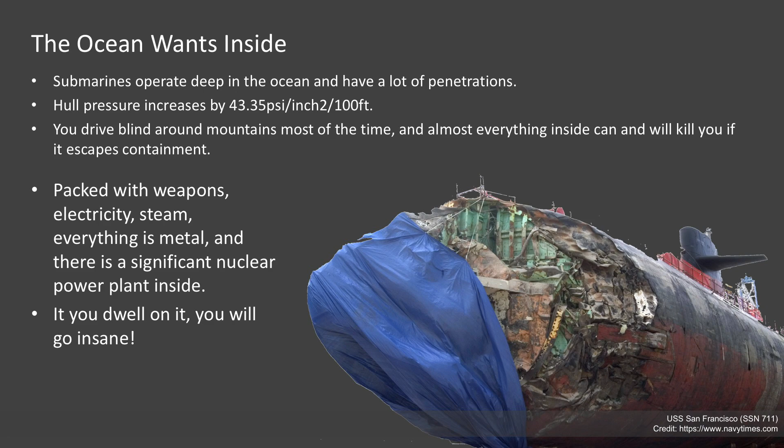It's packed with equipment that, quite frankly, virtually everything that's in containment inside of the submarine wants to kill you, including a rather substantial nuclear power plant that I ran. And so it's an interesting place to work, and if you dwell on it, it will absolutely drive you insane, and I've seen people actually lose their mind.

As if that's not bad enough, the guy who's been on the boat the longest has been there for 3 years. Think about that. So when people talk about training, I'm always kind of surprised at the inability to face the fact that we need to train. And the military probably does it better than anybody on the planet because they turn over crews, especially in the Navy, on a regular basis. And obviously, if you get shot in combat, somebody's got to step into your shoes immediately. So training is a constant.

There's a real good chance the guy sitting in the controls like you see right there, and you can see that's a pretty sophisticated video game he's got, with all the knobs and indicators. I never was on that boat. I tried to get on that boat. I really liked that boat. That was a USS Seawolf class. They didn't build a lot of them, but it was a state-of-the-art attack submarine, extremely stealthy, had some really cool technology.

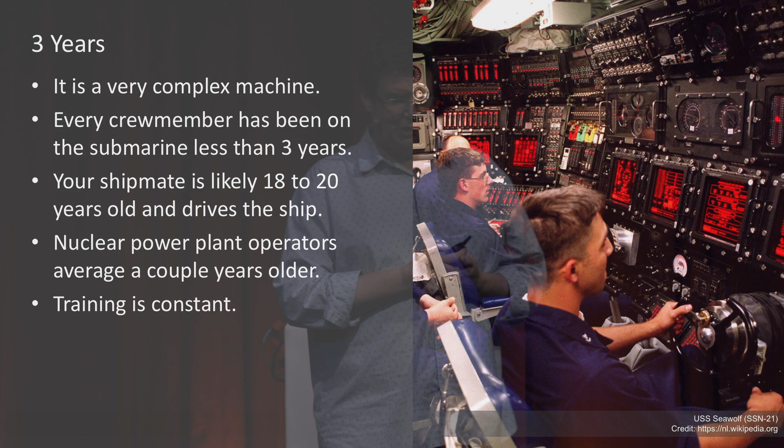That guy's probably 18 years old that's driving the boat, with all that stuff in front of him. And the Navy trained him to do it. And fortunately, there's somebody sitting behind him watching him. But in reality, there's a really good chance the guy driving the boat, keeping you alive while you're sleeping, is 18 years old. Yeah, the nuclear operators are a little bit older, but our control room looks a lot like that too.

So how does that compare to something like a refinery, for instance? So bad things can happen in a refinery. The advantage they have, and they do take advantage of this, is that they can run. If you've ever watched one of the CSB Chemical Safety Board's videos, or any of the other casualty videos that make the news or make it onto YouTube, they're pretty exciting when stuff goes wrong. And you do see people running rapidly, trying to stay alive.

On a submarine, unfortunately, you can run from about here to the camera in the back of the room, and then you've got to turn around and go back and fight whatever you're running away from. Training's challenging in the civilian world because everybody wants to go home and play with their kids. They want to go home and have a life. But in the submarine world, you don't have much else to do, so you train constantly.

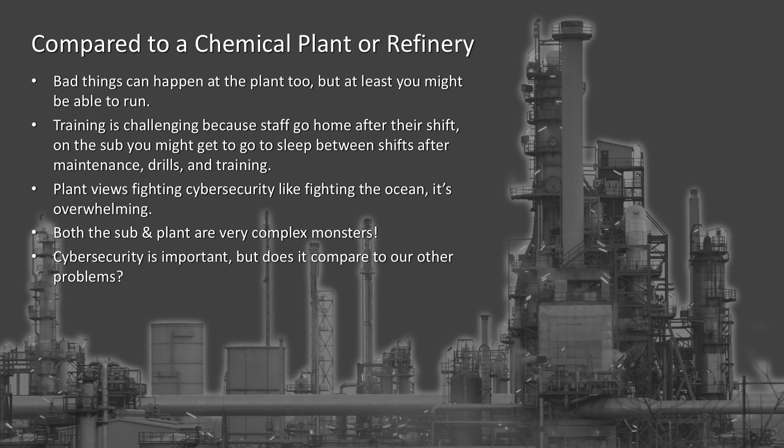The plant views fighting cybersecurity, unfortunately, a lot like fighting the ocean in the submarine world. So when I go into these places and talk to them, it's very common for them to look at me and say, Jim, I understand, but we've not had a cybersecurity problem, and I don't care. I'm much more worried about it blowing up, or I'm much more worried about production. So it is a challenge to get their attention and to find a way to solve their problem.

So, Brian, are you in the room? No.

So the gentleman and I were in another country working at a refinery trying to do the work in their language. And it's a big oil refinery in Europe. And I was sent there early to figure out what their ISA 62443 zones and conduit structure should be, because they really had never even talked about cybersecurity before we showed up. I was there to figure out what their risk was.

The guy reminded me that he was from a part of Europe that tended to stick people with long knives. It was an interesting conversation to have over dinner.

But basically what he was saying is, you're not trying hard enough to figure out what my real risks are, and you're not getting it through. We don't believe you. That was a very difficult place to be in. So we sat and argued through this over and over again, and I tried to convince them that a hacker could actually cause the physical things that they were afraid of.

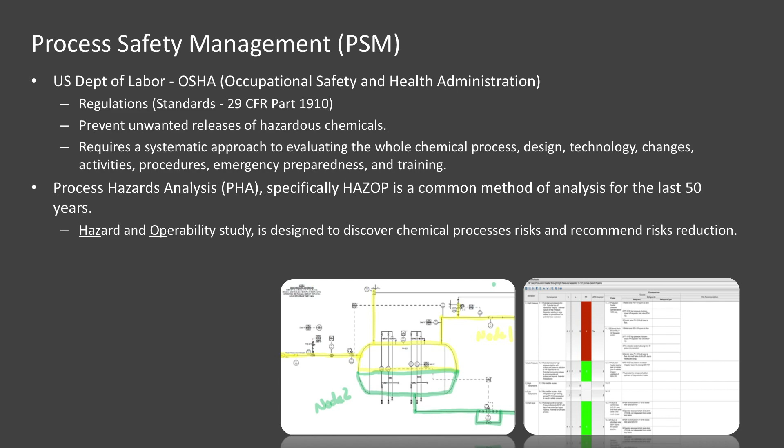And I sat back and went, well, this might work, so let's take a look at those. So we asked the refiner for their HAZOPs. Their HAZOPs were dated 1960-something. They weren't in the United States, so they weren't required to do them on a regular basis, but it was a starting point. We sat down and started looking through them, and we started asking ourselves some questions. But before I get to that, let's talk about what a HAZOP does.

So a HAZOP is designed to put the really smart people in the room around a table to talk about the process, node by node in the system, and they look at every single possible scenario and what the consequence of that scenario is. So what they're trying to determine is what's going to blow up, basically, what's going to catch on fire, what could leak. If it does leak, what will happen? And then they're trying to make recommendations for how to prevent those things from happening.

So where you hear defense in depth strategy, in the process industry they talk about layers of protection. So they'll start talking about layers of protection and looking for ways to solve things. So this is a very rigorous methodology. What you see here is one that was actually marked up by us as an example, but it is very common, and I'll go into it in more detail in a minute.

So as a result of doing this and talking to the customer and getting the customer's buy-in, and by the way, when we admitted to the customer that we agreed that the risks that they had already calculated were the risk for their facility and were the risk for individual parts of their facility, then they said, okay, we agree. That we can buy into. And all of a sudden now we had a group of people, including engineering, that said, yeah, we need to do something to prevent those things from happening.

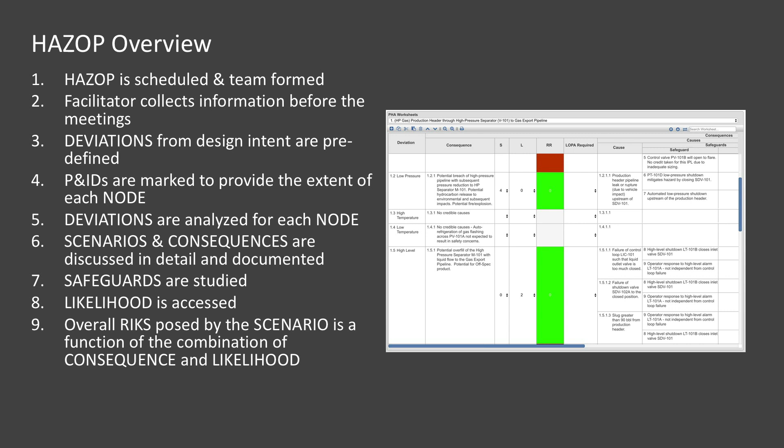So how a SPR differs is once a HAZOP's done, I don't go back and do a HAZOP. My company does HAZOPs for companies, and I really don't want to be in that business. I sat through one once and decided I never wanted to do it again. I'm a physicist by education, so I found that to be very painful. But man, that is hard to read. I thought that was actually my eyes.

What we do is we sit down and we look at the causes and we look at the safeguards. So what we're looking for in a HAZOP is something is going to make it happen. You're going to shut off a pump. You're going to open a valve. Temperature is going to go high. Something is going to make it happen. We look at all the causes to see if any of them are hackable. And then if the causes are not hackable, then we move on.

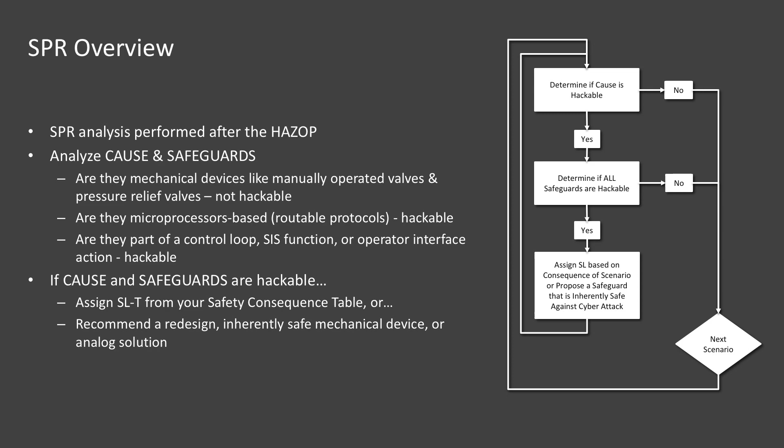If the cause is hackable, then we look at the safeguards. If the safeguards are hackable, then we got a problem. We actually have a hackable consequence. We have something that could actually realistically happen if some smart person figures out how to get in and make a mess of the system, or somebody who has a grudge against the company.

So you guys drove here today, walked here across intersections and stuff like that. Do you know that every intersection you cross, somebody actually did a calculation like this to decide how many people die at that intersection every year? Pretty comforting when you think about it, right? Airports, planes, cars, everything, traffic lights, they're all designed with consequence tables.

Risk, all right? So what we did was we added a column to the right, which is security level. This is normally done well in advance of ever doing anything, right? So the reason you do that, and it's an executive level decision, you don't get to decide what the risk is, and you don't get to decide what risk your company is willing to accept unless you own the company, all right? So the board is going to make that decision. Its executives are going to decide what risk the company can tolerate.

The reason why there is a risk, unlike the United States Navy, the Navy has risk. I mean, they sink boats in the ocean deliberately with nuclear power plants and weapons in them. It's a brilliant idea.

But they can actually spend money that the civilians can't to do stuff because they're spending government money. So the net result is, in the civilian world, we have to make decisions and decide how many people we're willing to get hurt. And normally that risk falls right in the middle there where it says typical risk tolerance is about 1 in 10,000. You'll hear that related a bunch of different ways, like 10 to the minus fourth you'll hear a lot, or e to the minus fourth or something like that.

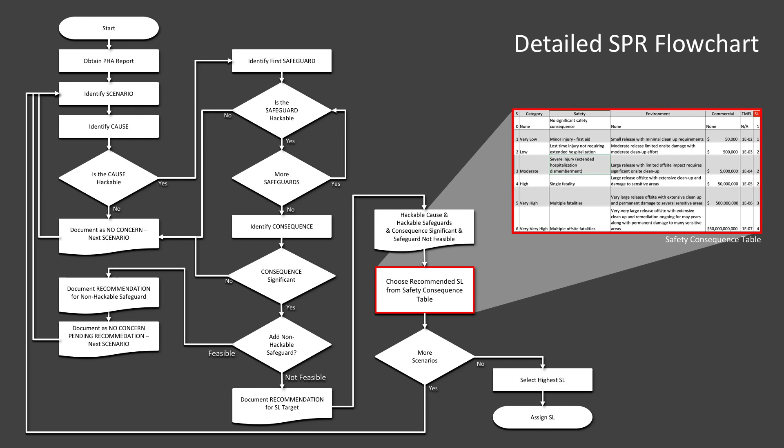It's not hard to do in practice, but in reality, what happens is when you get over here to where it says choose recommended security level from the safety consequence table, that has to be done before you ever choose. If it isn't done before you choose, then you're going to sit and argue about this for a week too. And in reality, the people in that room can't make that decision. The board has to make that decision.

All right. So the net result of this is if the cause is hackable and the safeguards are hackable, then the consequence can be generated by a hack. All right? Whether it's intentional or accidental or whatever, it can be generated by a hack. So it makes sense. The question you have to ask then is the consequence significant enough that I'm going to spend money to protect against it?

That sounds terrible, but think about every intersection. I could make an intersection safe so nobody would ever die in it. And you would kill me because you would hate using it. How many cars get to go through an intersection where nobody dies, right? Not very many, and not very fast, and not very often. So the challenge is, where's the balance? Where's that line at? So let's look at a quick scenario.

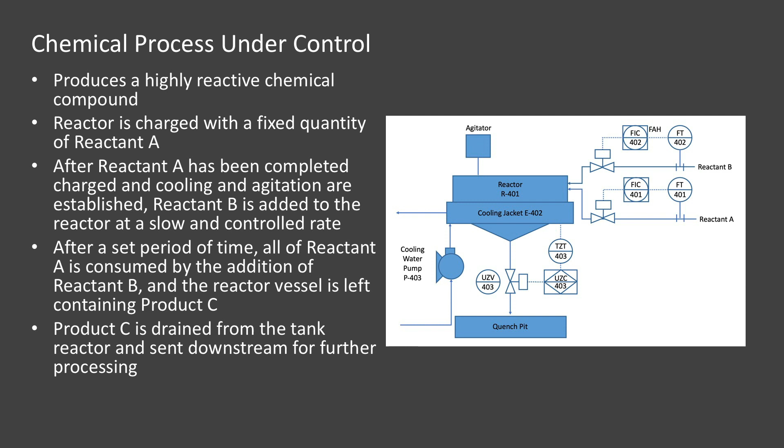So this is called a continuous stir batch reactor. The first time I ever saw these, I was right out of the Navy, and I got hauled into a plant in Barberton, Ohio, and I had sold the guy a variable speed drive to run that cooling water pump. Variable speed drives back then, this is like 1988, weren't very well known and very reliable at that point. And the thing kept shutting off, and every time it shut off, a whole bunch of bad things happened.

As a matter of fact, what happens in this case is the temperature starts climbing, and a safety system engages, and it opens that valve on the bottom of that big batch reactor, and it dumps a whole bunch of really nasty chemicals that are in the process of going exothermic into a giant vat of water, really nasty water. So you have a steam explosion, all kinds of cool things happen. So I went out to the facility,

and they had turned on this system, and I was standing there, and I noticed the lights dimmed. And I'm like, well, that's interesting, the lights in the building. And then alarms started going off, and I'm still standing there looking at the lights, wondering why the lights in the building dimmed. It's a large facility. And my host tackled me, knocked me behind an explosion wall, a physical barrier. And then there was a really loud noise, and what had happened was the drive had shut off, and this valve had opened, and all this stuff hit the water.

It did exactly what it's supposed to do, because technically that's a safe thing. However, when it does happen, people hide because it's nasty. If it didn't do that, the batch reactor would explode. It's only a matter of time until it does. These are used all over the world all the time. It's amazing how many things are made this way, and so now you know how it works.

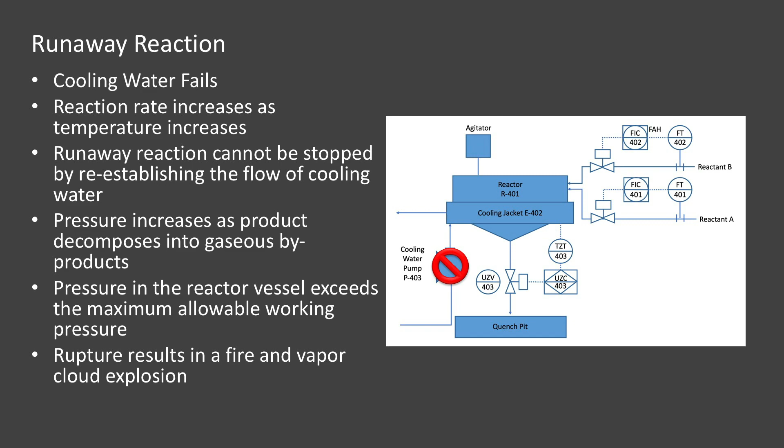There's a simple safety circuit here that measures temperature on the TZT403. The logic circuit there, which is actually coming from a PLC or a safety instrumented system, tells that valve to dump, and it actually is a valve that's forced close, and so it automatically opens if for some reason the control signal isn't there.

So in the SPR analysis, what we do is we look at the cause over here on this side. We ask the cause, can that actually happen? And you can't read the cause. I probably can't read it either from here. But basically, the water pump shuts off for some reason. And when it shuts off, the cooling jacket doesn't work, and the reactor starts getting much hotter.

So we looked at that and said, what controls the pump? It appears unlikely that a cyber attack, in this case, could actually cause the pump to break or fail. However, the start and stop functionalities are in a PLC. Sounds normal, right? So automatically we go, well, the cause could be created by somebody shutting off the pump.

Or some moron selling them a variable speed drive to run the pump. That's a joke, sorry.

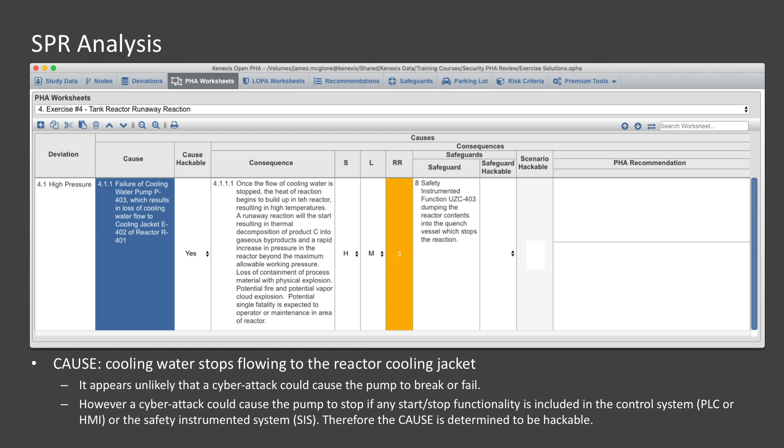All right, so then we look at the safeguards themselves. So the safeguards are listed here. By the way, you can do these for everything. So in the electrical world, you could do it to protect assets. In an environmental space, you can do it to protect the environment. In a lot of these companies, you do all that. You protect people, you protect assets, you protect the environment, production, you name it. All those things are taken into account.

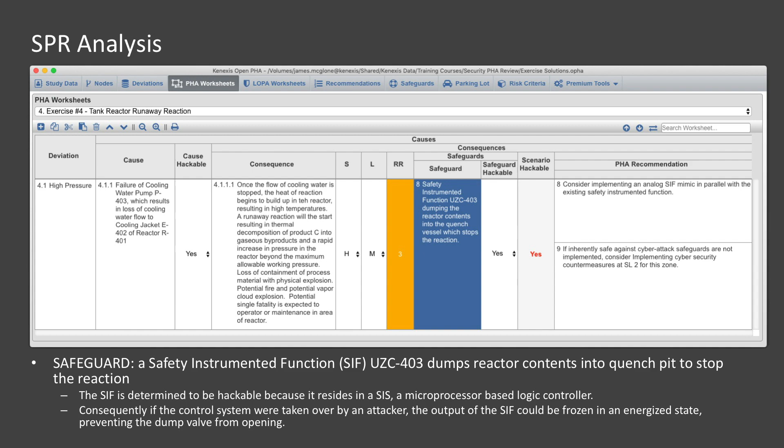So in this case, there's a safety instrumented system that actually is designed to open that valve. However, the SIF is actually in an SIS, and what did we learn last Christmas about SIS systems? They are hackable and have been attacked. All right, so the net result of that is the cause or the safeguard itself can be attacked too. So we look at that and we say, that's not good.

What's the consequence? Well, if you read down through the consequence, which I apologize, it's a little out of focus, potential fire, potential vapor cloud explosion, potential single fatality if the operator's expected to be in the area doing maintenance or anything like that. So basically, you could kill somebody. So if you can kill somebody, that's that 10 to the minus 4 thing, and you're required to implement security level 2.

The problem with security level 2 is, in the case of the refinery, they didn't have any security, and they all wore USB sticks around their neck walking around the facility. They didn't lock the doors, and they couldn't even shut the blast door on their control room. Bad.

So the net result of all that was we took a step back, and they said, is there another way? And so we took a look at it and found another way. We actually implemented a relatively simple solution to solve the problem. We did something with an analog mimic. So what we did in this case is we actually designed an analog circuit around the SIS system, and the decision now is actually being made in that device instead of that one only.

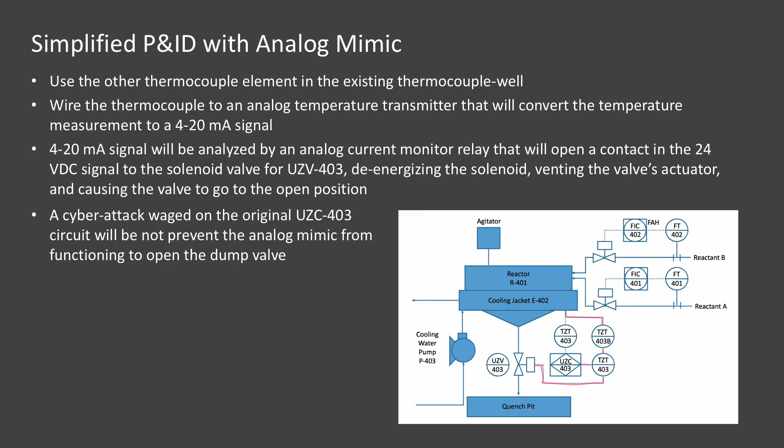So if the PLC, or the SIS system, says to this device, hey, you need to open up and let that valve go, it goes. If the analog circuit says the same thing, it goes. So basically putting them in parallel, now I'm not totally dependent upon it. Is this an expensive solution? It took a little bit of engineering to put it in, but in reality, it was much cheaper than going to security level 2 in this part of the process. So those are challenges that we face trying to solve these problems.

So here's a really cool thing. Years ago, we did a presentation here where we talked about a distillation column on stage, and I put a very junior chemical engineer on stage, and Brian Singer was hacking the distillation column, and the chemical engineer was describing how it would react. We design all these process plants, if they're designed correctly, for the most part, to protect themselves when the process goes awry. That's not a perfect answer.

However, it's amazing how many times a really complicated security problem, if you take a step back and look at the HAZOP, for instance, or whatever risk analysis they've done, you might be able to figure out how to use an alternative method to solve the cybersecurity problem, something like a pressure relief valve and a spring.

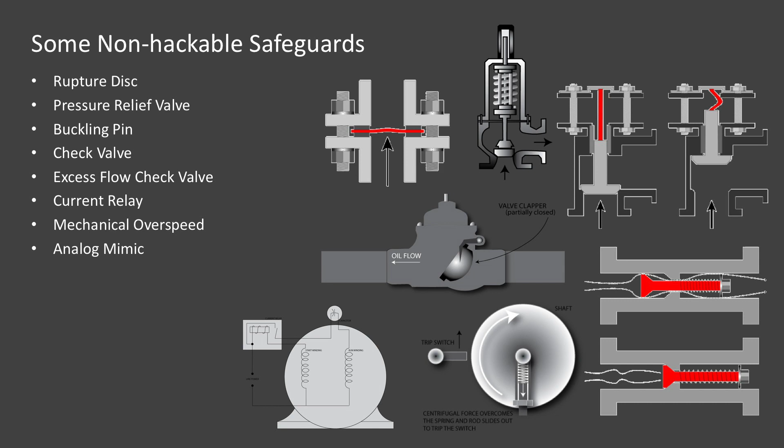Maybe you don't hook up the motor overload switch to the PLC with a digital connection. Maybe you actually use relays. Somebody was up here earlier talking about building automation. You know, the cool thing in the fire code, a building automation system is not allowed to talk directly to the fire control panel. The fire control panel is not allowed to talk digitally or directly to the building automation system. They're patched together with a mechanical relay. Think about that, all right? So we can do some cool stuff.

SPR benefits, not changing the risk that you already figured out. So one of the challenges we have in this industry when we're doing vulnerability assessments and stuff, or we're doing any level of cybersecurity work for them, is how do you tell them what their risk is, right? Well, first of all, you trying to tell them what their risk is probably isn't going to be taken very seriously unless you really have some intense bona fides. I'm a physicist, and they challenge me, right? So it's a little bit of a challenge.

Looking at the actual cause and the safeguards for vulnerabilities is pretty easy to do in reality. Whipping through a HAZOP with guys who actually know how to read these things and know how to read the P&ID drawings isn't that painful. It actually can be done pretty quickly. It gives people a thing to focus on. So think about it from a strategic position.

If you're trying to figure out how and where to start, and you run something like a refinery and one of us walks in and says, hey, I'm a cybersecurity dude, I'm here to help you. And they're like, yeah, get out. Okay, wait a minute, we can't say that to you because the boss said we need to do cybersecurity, so what do you got? And you start talking, the challenge we run is, one, we don't always understand their language. Number two, they got a whole bunch of other things on their mind.

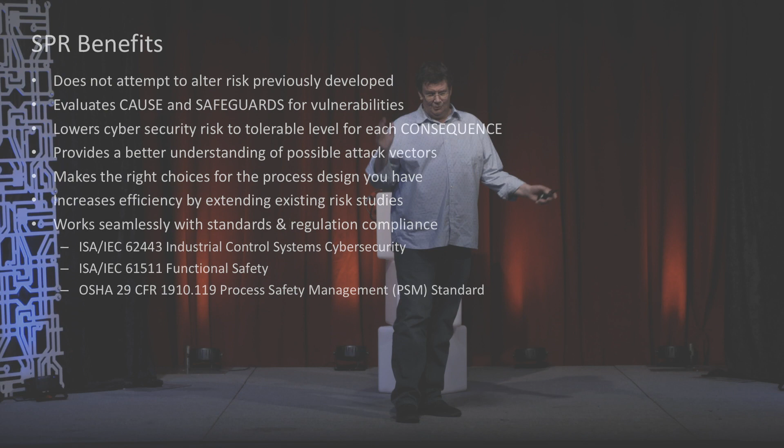So if we can find a way to make this easier for them, to start to help them, to give them a path, to actually make sure that the really bad things that they're the most afraid of won't happen, then we can take a step back and actually do the other things too. So it works pretty well. Actually, it works really well. Fits right in with the standards that exist.

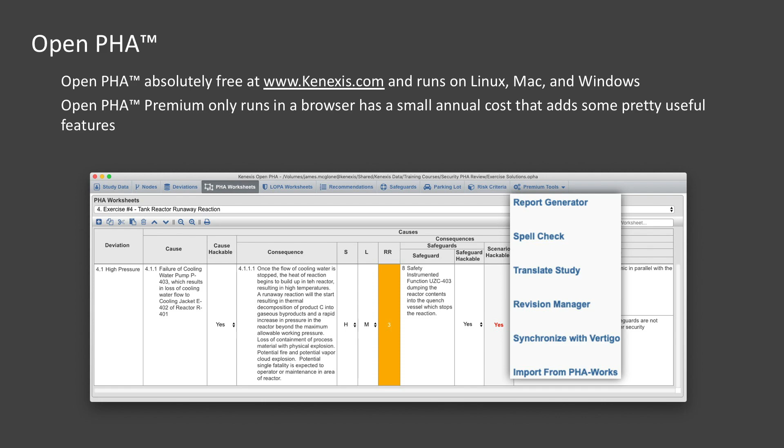That's me. Questions? Questions? That's for the back. We have a question here. Oh, no, that guy can't ask any questions. He reviewed the book. Thanks, Samuel. Hey, that's Jim. Pretty cool. I actually hit 0.00 on the clock down here. That's awesome. Okay, sure. Hi, I'm Andy Bochman from INL. Jim and I know each other.

It always seems to me like it had to be a terrible idea for safety instrumented systems to become digital, and then still worse for them to integrate for convenience and efficiency into control systems. One big digital playground. What happens when you guys go and see a setup like that? What do you start to think, and what do you start to recommend? That's a good question. Did everybody hear the question okay? All right. We don't panic.

How many hackable events, how many clearly defined hackable events have been documented in industrial applications? Seriously. I know we can hack building automation systems day and night.

I used to be the vice president of Tridium, so all you guys who know what Tridium is in the Niagara framework, that was me. Now you know why I'm at Kenexis. I'm kidding, it's a joke.